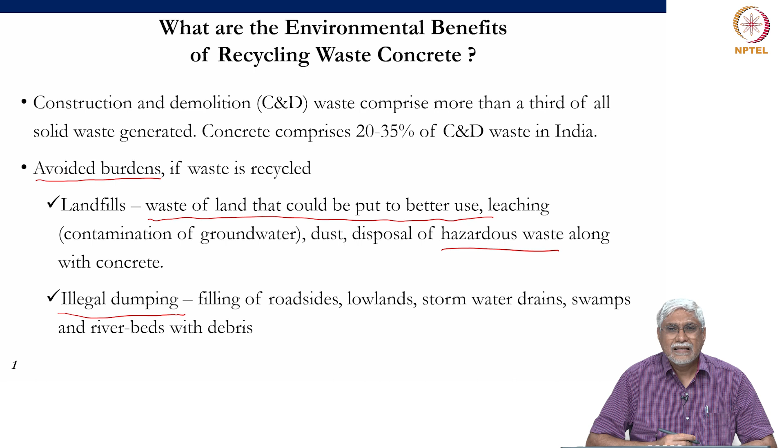One technique that is used to go further and see what are the environmental benefits or demerits of any technology or product is called life cycle assessment. Life cycle assessment can quantify the environmental impacts of a product or service. This can be done with different indicators. I am going to take two indicators, the carbon footprint that we talk about a lot and embodied energy. And you will see that in most construction related activities, we talk about these two indicators, the carbon footprint and the embodied energy, more than anything else.

And even in the research done on construction demolition waste, when we are analyzing, comparing different techniques, technologies, we use this life cycle assessment to compare different products or processes. Now, life cycle assessment studies can be performed for various scopes or systems. What is a system? A system is a group of processes that we consider for the assessment. So, in terms of construction and construction demolition waste, there are three categories that we can think of.

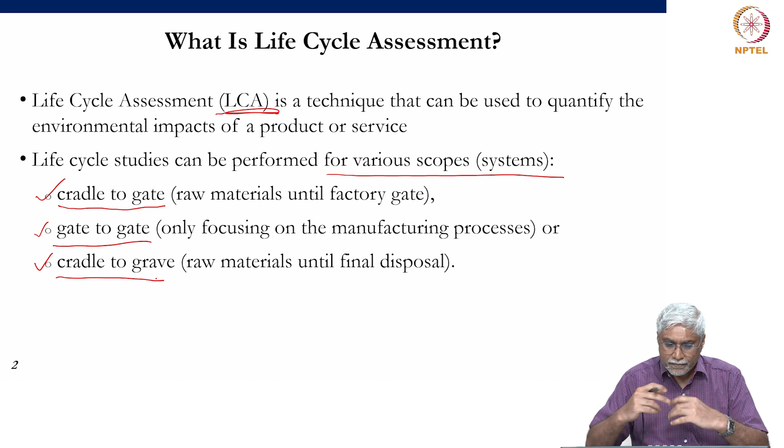So, we use this life cycle assessment for the analysis of cement and concrete systems. We have done a lot of such systems at IIT Madras. The process of LCA follows the ISO guidelines, where we have first the goal and scope. We have to understand why we are doing the LCA, what it is going to be used for, what is the purpose of doing the LCA. In the scope, we have to define the system that I just talked about a few minutes back.

In the case of cement and concrete, the goal and scope is basically to choose a concrete system that has a low environmental impact. We want to see how to develop new technologies. We want to be able to compare different products so that we can choose the one that has the lowest environmental impact. And for this, we have to decide the functional unit, whether we are looking at a ton of material, a cubic meter of material, or a building in its entirety. That will define the functional unit, and that has to be same throughout the comparison.

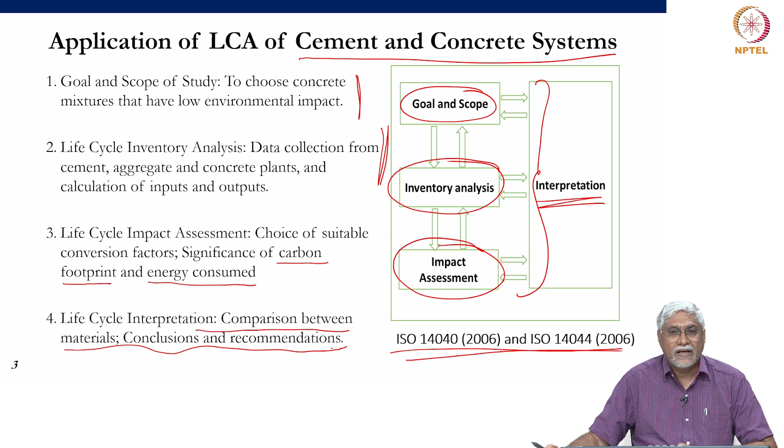So let's look at some examples or typical cases that we have worked on. So let's start with cement, because we know that cement has the most carbon emission out of all the materials that we use in concrete. So here I have a typical case of a cement plant. So we go to a cement plant and then we find out all the processes that are involved. Say this is a cement plant that produces ordinary Portland cement.

So OPC stands for ordinary Portland cement, and PSC is for Portland slag cement. So Portland slag cement would have about 50 to 60% of GGBS, that is ground granulated blast furnace slag. So this process map here looks very complicated, but this is something that has to be done.

So what does it have? We are putting together all the materials and processes involved for calculating 1 ton of these materials. So 1 ton becomes the functional unit. And now what we have is all the materials that are going to form the cement. So you have here the different materials that are going into making the cement. Mostly limestone.

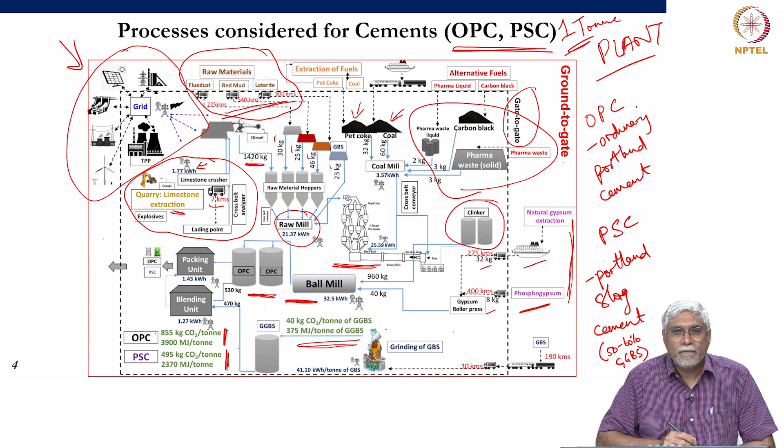So, in this case, the values come out to be about 855 kilograms of CO2 per ton of cement as the carbon footprint, and this is for the analysis of gate to gate. The same values for Portland slag cement, where some amount of GGBS is also ground in, is about 500 kilograms of CO2 per ton of cement. Okay. So, here, as I said before, about 50 to 60% of GGBS is incorporated in Portland slag cement, and therefore, the carbon footprint and the embodied energy comes down significantly.

So, this is what we will do for cement, and let me give you some examples of what we have. So, in the ground to gate system, say in this particular plant, if I am going to make a ton of ordinary Portland cement, I would have more than 900 kg of CO2 emitted for every ton of ordinary Portland cement. Suppose it is Portland pozzolana cement, where I have a lot of fly ash, 25 to 30% of fly ash. The CO2 emission comes down by a substantial amount, from 900 to less than 700.

In Portland slag cement, I have more substitution of the clinker, and then you see that this is even better. It comes down to about 550 kg of CO2. LC3 is a new type of cement that we have done a lot of work on. It stands for limestone calcined clay cement, where we have 50% clinker, 30% calcined kaolinitic clay and 15% limestone. And the limestone could be waste limestone. We are not using limestone that is meant for cement production.

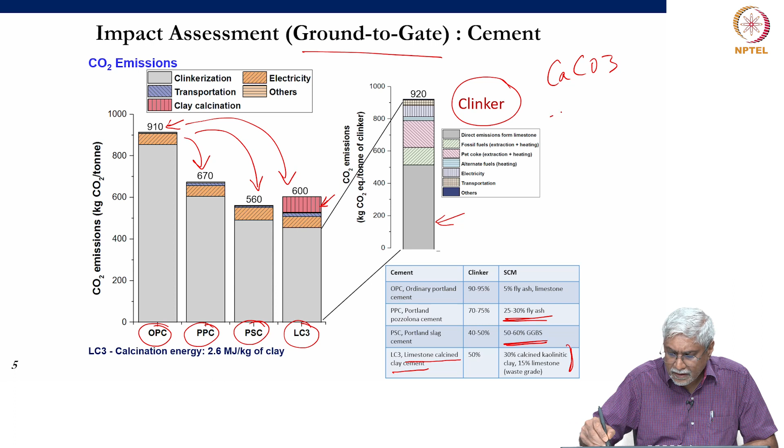So, what we find is the main culprit in having a high carbon footprint of cement is the clinker. And in the clinker, most of the carbon footprint is from the limestone, because calcium carbonate converts to calcium oxide and CO2. So, anytime we convert limestone into calcium oxide, we are going to give out CO2.

Other than that, we have the fuels. The fuels are being burnt because we have to heat the material to 1500 degrees in the kiln, and this is going to emit CO2. So, in this case, pet coke and other fossil fuels are used. So, the grey part of each of these bars is clinker, and we see that as we decrease the clinker, we are going to reduce the carbon footprint.

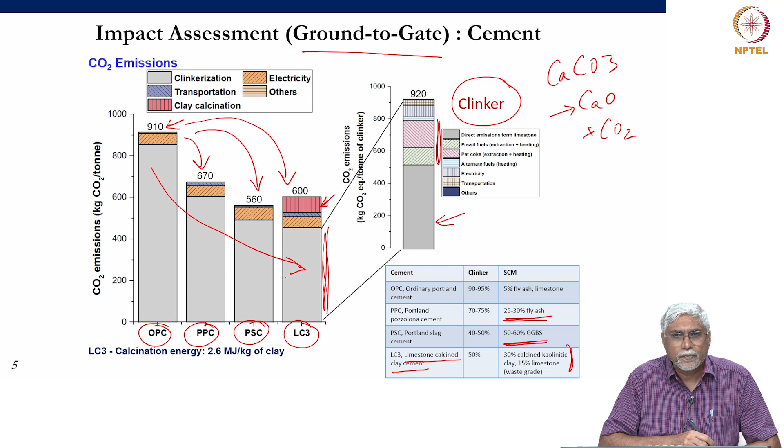Similarly, we can look at the energy consumed or the embodied energy. This is again for a ground to gate system, and I am looking at the 4 different cements that I just discussed: ordinary Portland cement, Portland pozzolana cement. So, the PPC has fly ash, PSC has slag, and the LC3 has calcined clay and limestone powder. Again, the grey part is coming from the clinker, and in the clinker the embodied energy is mostly coming from the fossil fuels, pet coke and other fossil fuels, and the electricity.

So, this is the electricity consumption. Electricity also is used a lot. So, that has its own embodied energy content for the production of electricity, not just the electricity itself, but the embodied energy of the electricity. Consequently, as we decrease the clinker content, we find that the overall energy requirement also decreases.

Similar to what we saw before, from 5900 in the case of OPC, for PPC the value comes down to 4600, PSC 4100. For the case of LC3, it will be more than the PPC and PSC because we also need energy for the calcination of the clay. It is less than that of clinker because the temperature required for calcination of the clay is about 700 to 900 degrees Celsius instead of 1500 that you would have in a clinkering kiln.

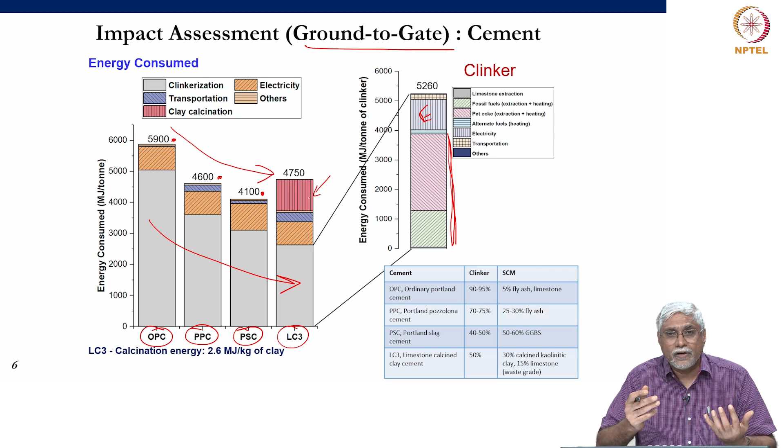So, this gives an illustration of how life cycle assessment is done and what we get as indicators that we can use for comparing different materials, for choosing the right material for a certain application.